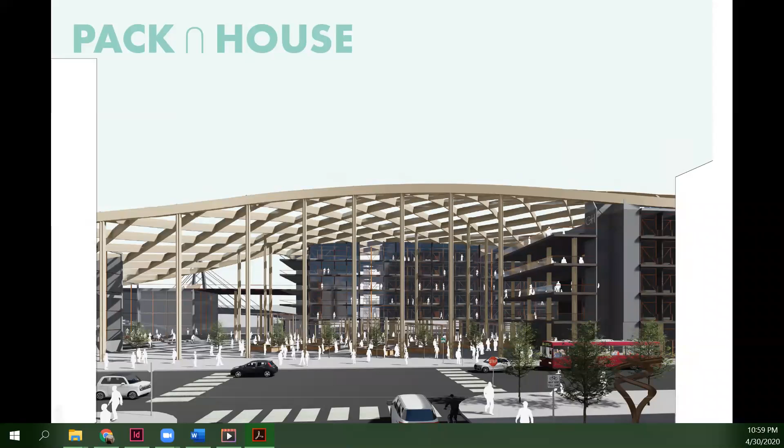The goal of my project is to lessen the financial burden on local farmers by integrating an agricultural packaging and distribution house with a mixed-use development all under one roof, in hopes that it will bridge the gap between urban and rural communities.

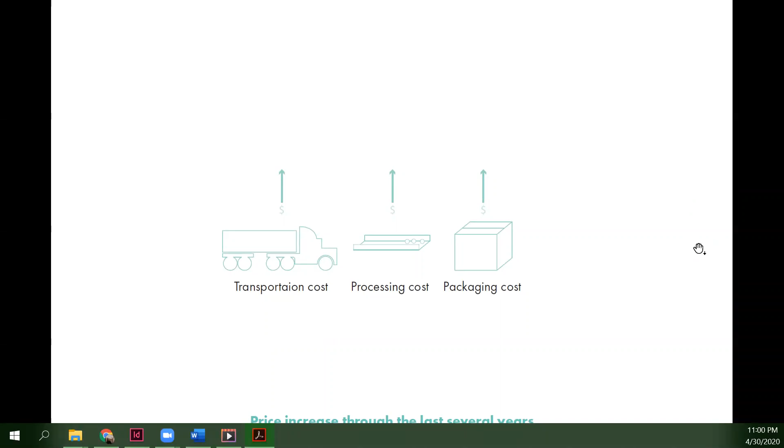The way I approached this project is by analyzing the local farmers of Spokane, and found that over the last several years the cost of transportation, processing, and packaging for fresh produce has increased significantly, to the point where consumers are buying less fresh produce and looking at alternative sources. This hurts everyone, especially local farmers in Spokane County, who are facing a 66% decline in their profit margin, close to a $35,000 difference between 2012 and 2017.

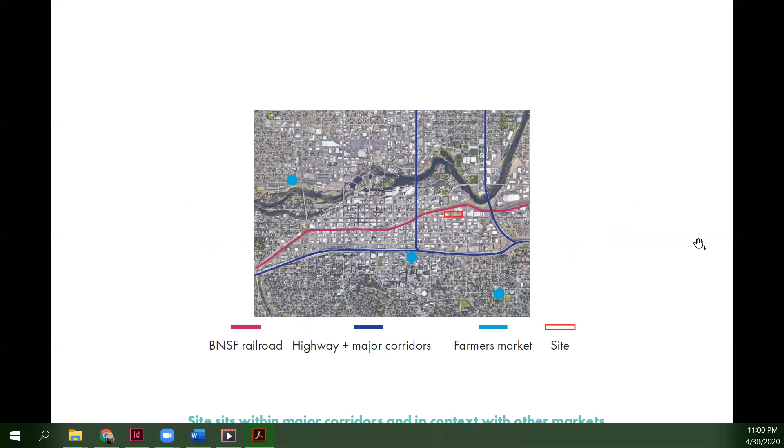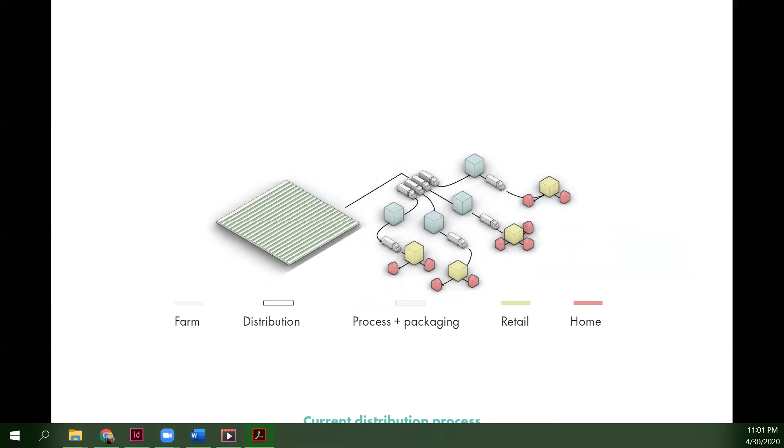The development can also act as a hub for farmers from across the region to sell and distribute their products. The current distribution process for local farmers is to send their produce to a processing and packaging facility, then it goes to a market where the consumer purchases the product and takes it home. However, at every stop, the value of the product increases, making fresh fruits and vegetables more expensive and less fresh.

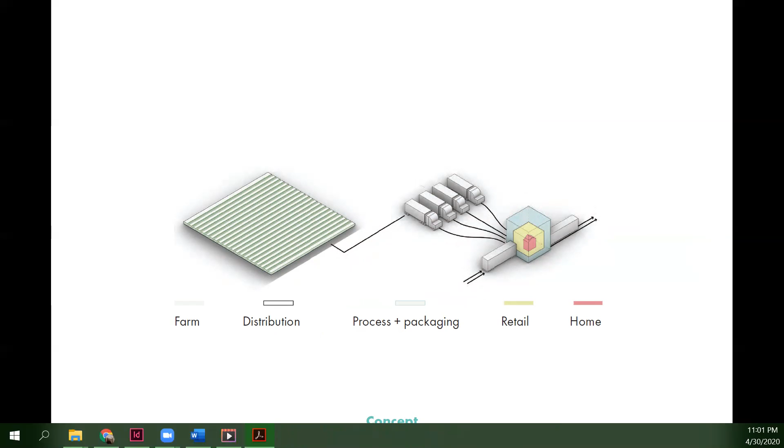My concept would be to integrate all the different programs into one development so there could be fewer stops, meaning the farmer sells directly to the consumer, and the consumer can visually see how their produce is processed and packaged while receiving fresh goods.

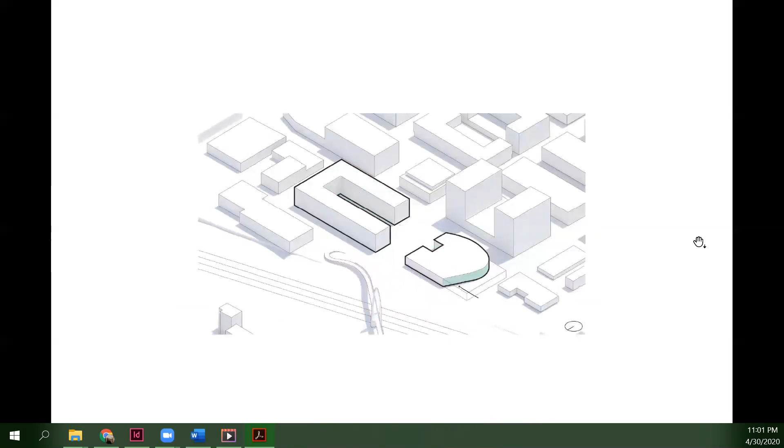My design process started by placing two masses: one is a 60% housing requirement, and the other is the facility on the site. I created voids for residential daylighting comfort and used the voids for public courtyards and market space on the ground level. I adjusted the facility for truck circulation and accessibility.

I enclosed the development with a large canopy to connect all programs and also provide year-round weather protection, because Spokane sees all four seasons, sometimes in the same day. I pushed and pulled to create spaces above the hub for a public observatory that peeks into the lower facility.

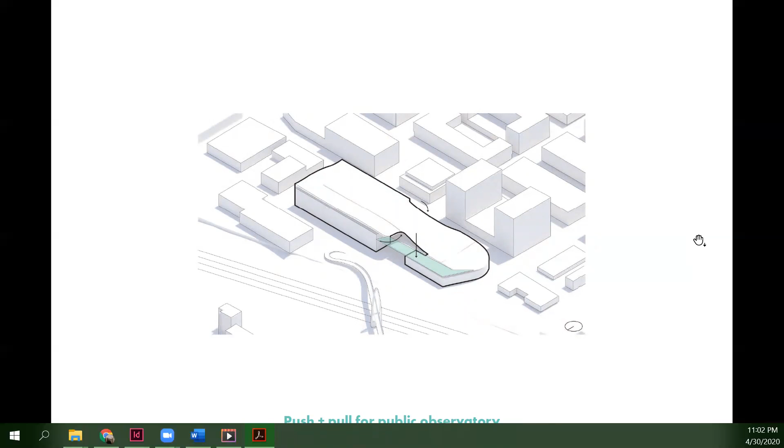Finally, I designed a structure out of glulams for efficiency and transparency. The entire structure is enclosed with glass, but has large openings at the entrance to keep the open-air market feel. Here's how I laid out the programming.

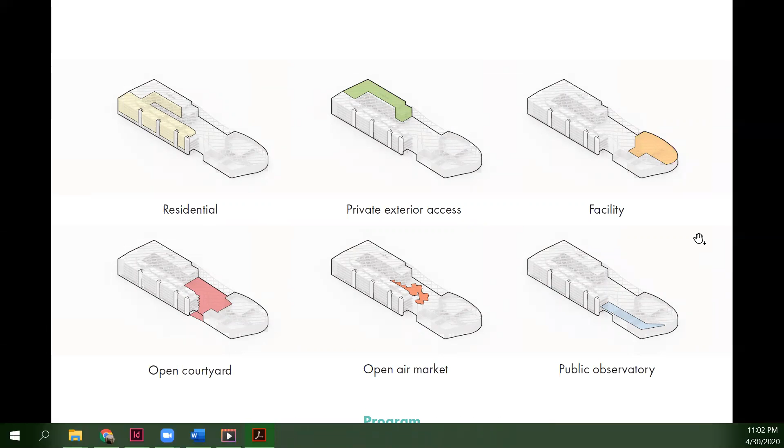I made sure that regardless of their placement, the programs interacted one way or another. I attempted to make the entire process, from when the product comes in until it leaves the facility, as transparent as possible. This process is generally behind walls and left unseen by the general public, but I wanted to express it, because it could be an exciting experience to see how our treatment of produce happens.

In my site plan, I try to demonstrate how the trucks move in and out, as well as how the development is accessible from all parts of town. As you can see, the moves made inside are able to bleed out into the urban fabric.

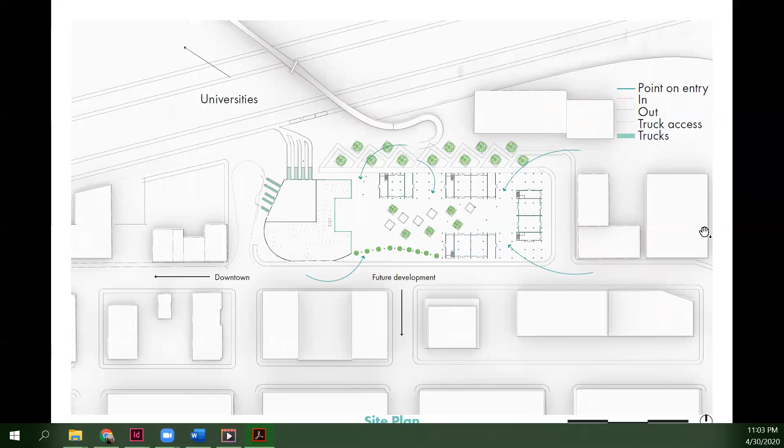In my section, I'm trying to demonstrate the entire process from beginning to end, where the produce comes in via train, gets processed and packaged with complete transparency, then sold through the open-air market. With the on-site dining, visitors can have fresh meals daily, and finally, for those who live there, access to inexpensive produce at all times of the year on the ground level.

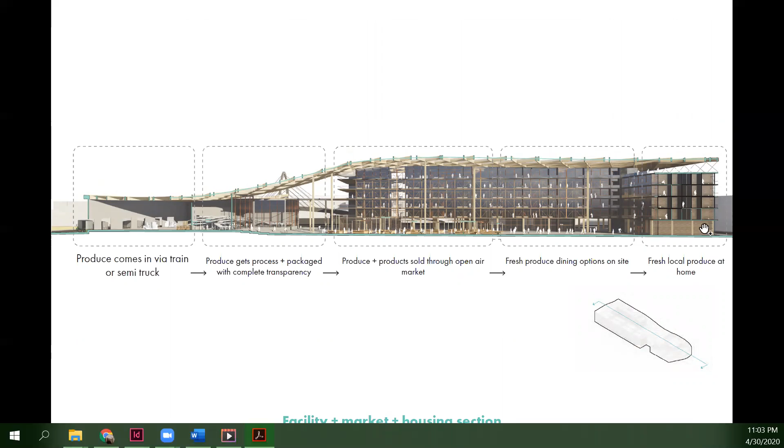Since my roof is the dominating element, I made sure you experience it at all levels. In this case, you're above it, meaning you can see below into the facility. Here you're within it, so you can see the underneath at close proximity. And here you're beneath it, so on the courtyard and residential level, you feel different experiences at all scales.

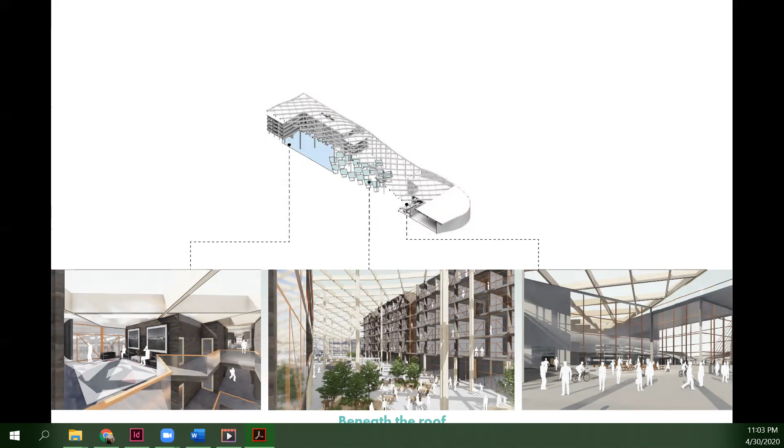The way this all works together is through columns and structural CLT. The glulam structure rests on the columns and structural CLT panels. The panels all sit within each other and stack upon each other, laying until they reach the column, so they're able to distribute the weight effectively and efficiently.

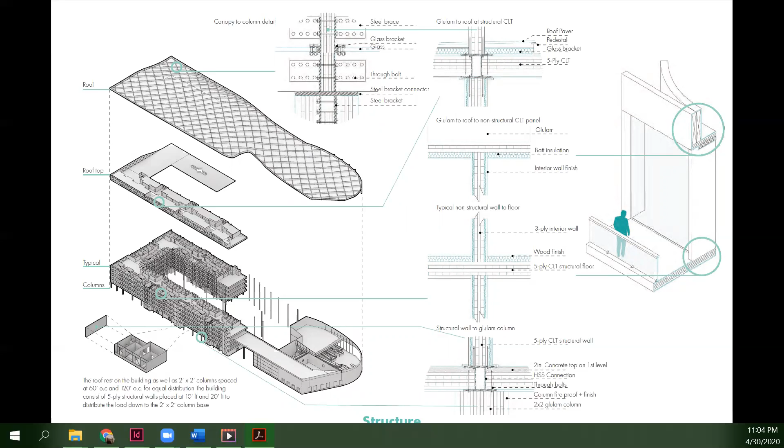In conclusion, I believe my project is able to bring together urban and rural communities by providing all these vastly different programs under one roof, not just to lessen the financial burden on farmers, but to provide transparency that isn't normally expressed in the agricultural world.

In a program like this, I think everybody wins, the consumer and the farmer. Thank you for listening.